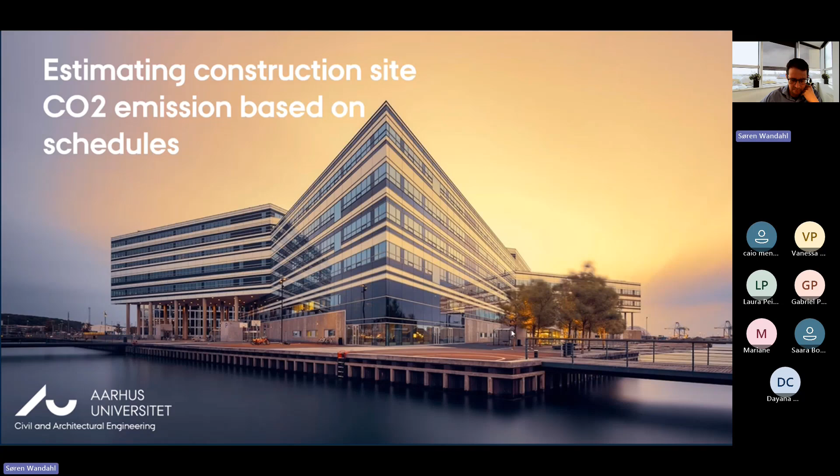Just very briefly about me, not to spend so much time on it. I'm a professor here in our department. I have a bachelor in civil engineering, then a Master of Science, a bit more in operation management, and then a PhD in construction management. That was at another university than Aarhus, it was Aalborg University, not here in Aarhus. I've been here at Aarhus University in Denmark for the last 12 years, and more or less my entire career I worked with production planning and control and lean aspects. For many years it was much about scheduling, productivity, quality and time, and in recent years it's been more and more on green construction sites and how we can use lean principles to make construction more sustainable.

Just so you know who is speaking, I added a few photos of my everyday life outside the university. A picture of my dog, I spend a lot of time with him. I have an old house that I'm renovating. I like to play a lot of darts, and of course I also watch soccer with my two boys, so we spend time on that. Just so you know who I am.

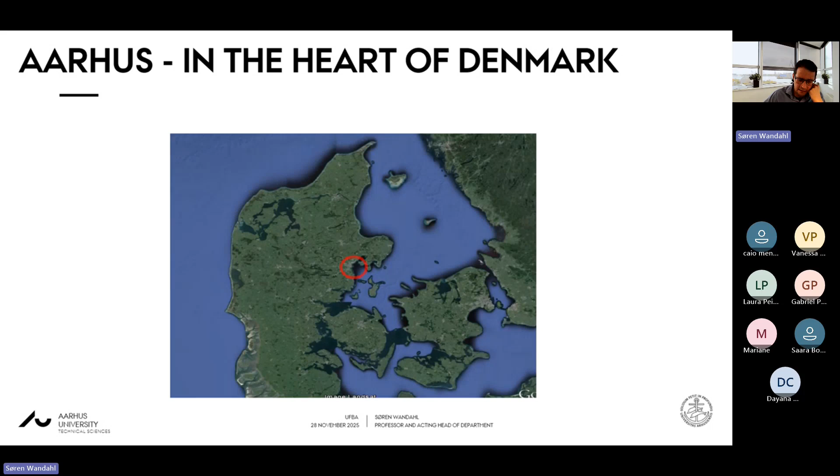As Dayana said, I'm situated here in Denmark, and of course you know where Denmark is. Denmark is a small country in the middle of Europe. They say it's the most happy country in Europe, so I hope that's correct. A small country in the middle, maybe a bit northern of Europe, so it's relatively cold here right now. Zooming in on Denmark, Aarhus is situated here in the red mark in the center of Denmark, about 2-3 hours away from our capital, Copenhagen. Copenhagen is the biggest city in Denmark, and Aarhus is the second largest city.

Our campus is just in the middle of the city center. You can't really see and understand that, but I put a green dot in the upper left corner, which is the campus building where I'm sitting right now at the harbor front. The main campus is marked with the red areas and extended recently with some of the more purple areas, so it's really a city campus. That was just to introduce myself and my department and where I'm from.

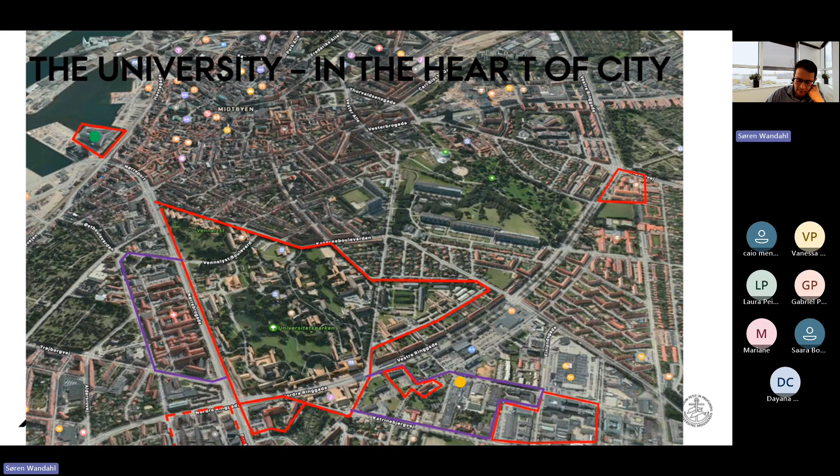I will now move on to talk more about the topic of construction site emissions. These numbers are from the Danish construction industry, but other reports say they are very similar in other countries. Here in Denmark, around 40% of all energy consumption used in Denmark originates in the built environment, to construct buildings and operate buildings. We also have a big waste issue, especially from construction, where today we know that around 35% of all waste generated in Denmark and put onto landfills originates from the built environment. So we are by far the industry in society that generates the most waste.

On the political agenda, there's so much focus on CO2 emissions due to global warming, so a lot of what we do has to reduce CO2 emissions. Estimates show that around 20% of all emissions in Denmark originate from the built environment, and maybe 10% of that is actually from construction and materials, which is where we want to focus today, on construction activities on construction sites. What kind of environmental footprint are we putting on society, and how can we measure that, and how can we reduce that?

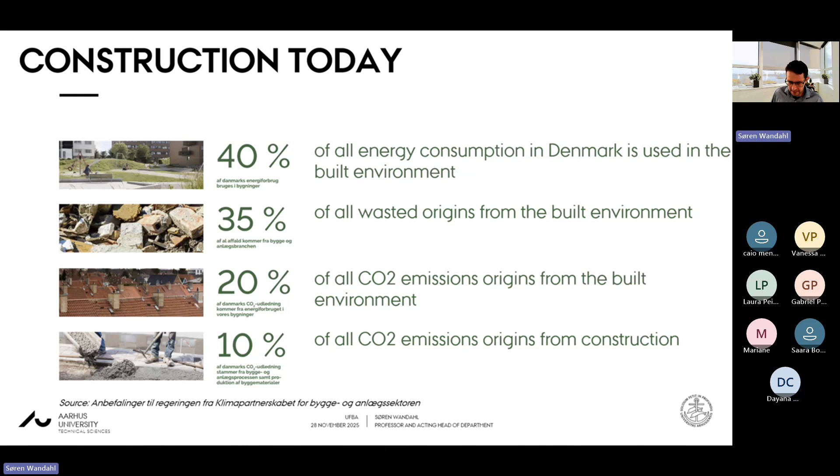So that was kind of to frame the situation. And putting that into a little bit of a historical perspective, there has actually been a big change in how our energy has been used in construction. If you go back maybe 10 or 20 years, looking at what I could call a typical building here.

When you try to separate whether the energy is used for operation purpose or for what they call embodied, meaning used for producing materials and constructing on site, you could see that historically most of the energy consumption was in the operation of buildings for heating, cooling, lighting, and so on.

But today, the engineering design companies are so efficient in designing low energy consuming buildings, which they call high performance buildings. Anyway, designing buildings which have a very low operational energy footprint.

But at the same time, there has been very little focus on reducing the embodied energy use. Here it says embodied carbon, but this is of course the carbon footprint arising due to energy consumption. So we haven't really focused a lot on reducing our material use, changing the type of material, reducing waste of materials, and so on. More or less in Denmark, and I guess it's the same in most countries, we're

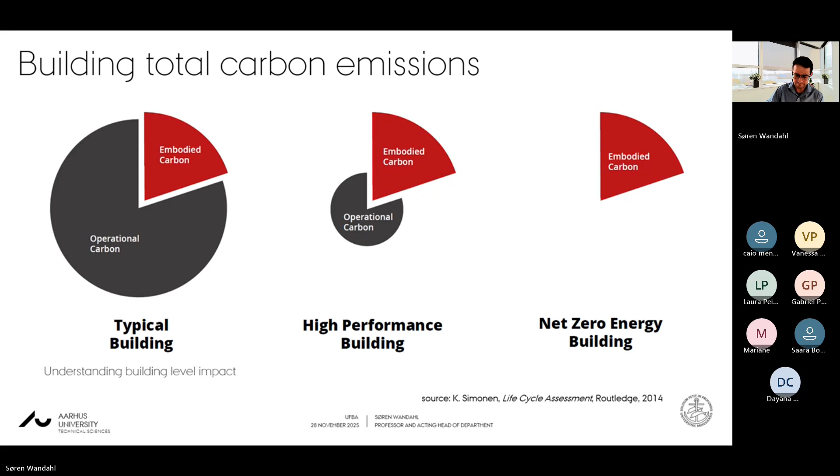To give you a rough idea of how it has changed over time in Denmark, it has actually reduced from maybe around 350 kilowatt hours per square meter per year for operational energy purpose down to 40 in average today. So it is more or less a factor of 10.

But so that's just to frame it. The problem is that we haven't really done anything about the embodied energy, the materials that we are using and wasting on construction sites.

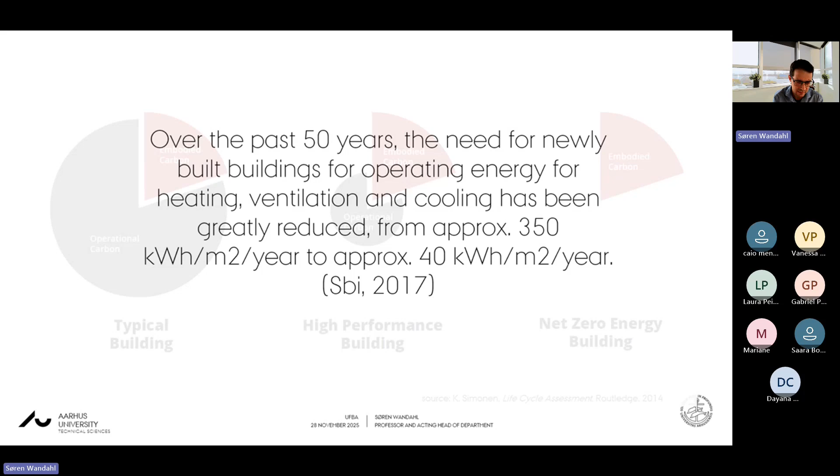And to get that into the equation, it's not enough just to look at operations and how much energy we use in daily operation. So we have to come up with a different framework. And this is typically the framework of the life cycle assessment, or LCA, right?

It's a framework you can use to calculate or evaluate, and maybe use as a starting point to reduce the environmental impact of a product, or here typically a building's entire lifespan. So now we are interested in mapping the energy consumption from raw material extraction to making the materials, to installing them on site, to operating them, to doing maintenance on them, and also at the end of life doing the disposal of these materials. So this is what we call a life cycle assessment.

And the reason I'm putting that forward here is that from this year, 2025, in Denmark, there's a new building code, a new building regulation that requires that all new builds must do a life cycle assessment in order to get a building permit. And there are some thresholds on that, one of which is related to construction site activities, which we will see a little bit later here.

Trying to unfold a bit the life cycle analysis - and I don't know, honestly speaking, how much knowledge you have about life cycle assessment or how used you are to working with it, so this may be purely repetition - but anyway, in a life cycle, we divide it into different stages. We have what we call the A1 to A3 stage, which is production or extraction of raw material, the transportation of these materials to a manufacturer, and the producing of goods. It could be concrete, it could be wooden panels, it could be whatever type of material that we are later going to build in our construction.

And then we are approaching what is of interest to me, the construction site, because we have A4, the phase of transportation to construction site. And then the most interesting part, phase A5, which is where we have our construction stage. This is the installation, all activities on construction site. Then at some point, a project is completed, it's handed over and starts operation.

And then we have all what they call B1 through B7 stages, which is the use, the maintenance, the repair, the refurbishment, operation of energy, operation of water, and so on. So everything you do throughout the operation of the building. And eventually, we have an end of life stage of a building where you are deconstructing, demolishing the building, transporting the waste material away, and doing disposal of that. So this is the entire life cycle of a building.

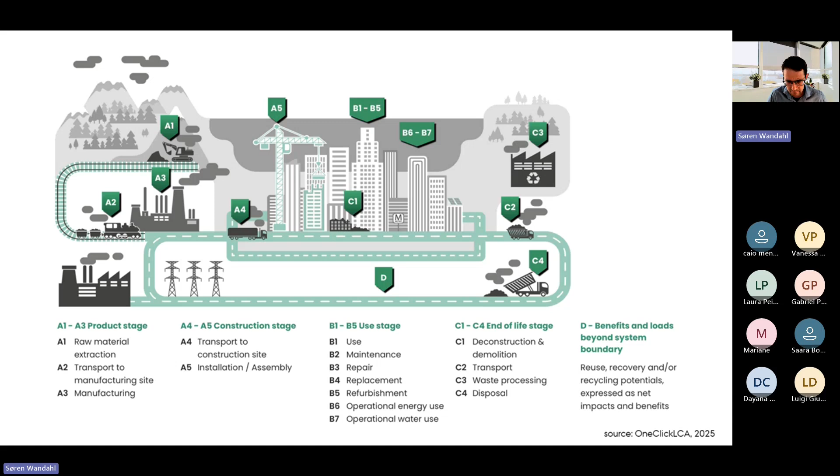And today we are going to focus mainly on the phases A4 and A5, which of course is the one that is relevant when we are talking about construction management and engineering.

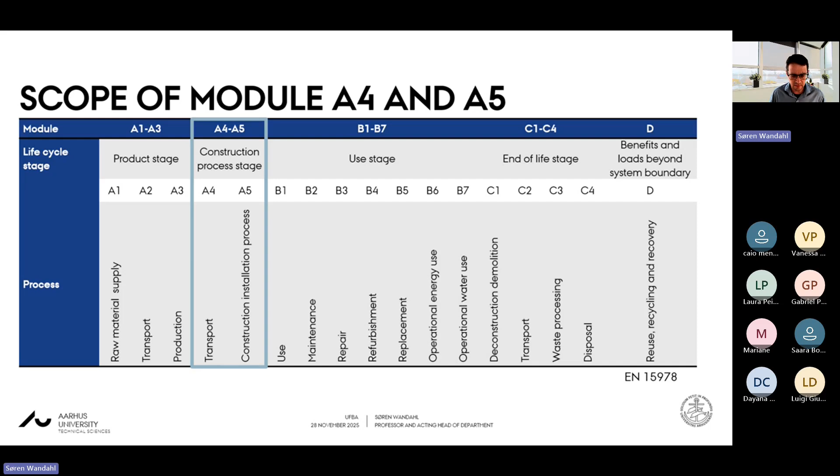But then on the construction site, we have a lot of activities going on, construction activities, of course. And many of these are using energy. It could be for processing, for using machinery on the construction site. It is for lighting of the construction site, for electricity in our offices on construction site. At least in Denmark, it's also in the wintertime for heating of construction sites and so on. So we have a lot of different sources of energy consumption on the construction site.

And then we also generate some waste. It could be material waste, soil waste, and other types of waste, which we then have to transport away from the construction site again. So this is our boundary condition here for construction management, looking at how sustainable a construction site is and what environmental footprint such a construction site will generate.

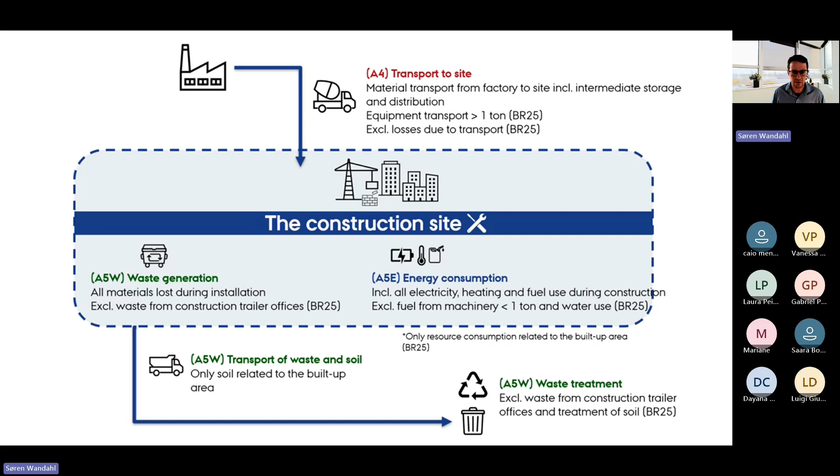And as I mentioned, here in Denmark, we have a new building regulation from this year, 1st of July this year, so it has been enforced now for almost half a year. And I guess we are actually right now the first and maybe also yet the only country in the world that has a strict life cycle analysis requirement for construction phase A4 and A5. So today, in order to get a building permit, a project has to document that they are below a threshold value of 1.5 kilograms CO2 per square meter per year for construction activities, the A4 and A5 combined.

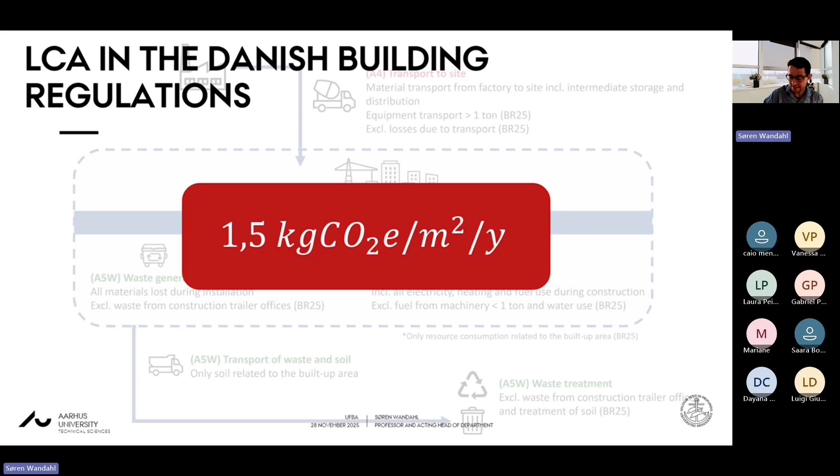Of course, when you put on regulatory threshold values, the industry, they start to listen, right? Because now it's become super important for the industry that they can achieve these building permits. So now the industry has suddenly become very, very interested in construction site energy use and carbon footprint.

But the problem is actually that we know very little about this energy use on A4 and A5. And the Danish government, when they launched this regulation of 1.5, they also said that this is their first attempt to regulate. They don't know whether that 1.5 is a strong threshold value or an easy threshold value. They assume that some projects will have it easy to comply with the threshold, and others will have more difficulties.

So, of course, as a research institution, one of our tasks is to investigate that further and create some knowledge around that. So we're doing a lot of research and some case studies. And here I just took some examples of a case study we have, some master students that are doing right now. So they have been looking at different construction cases and trying to do the life cycle assessment of these cases, specifically looking into A4 and A5, which is of interest to us, again, what's going on the construction site.

So this study here, which includes 10 case studies, you can see that the A4, A5 combined in this analysis is around 0.58 to 3.46 kilogram of CO2 per square meter per year. The median is 1.21, and as I said, the regulatory framework is 1.5. So you can see some projects are above, but many projects in this small case study are below the threshold value.

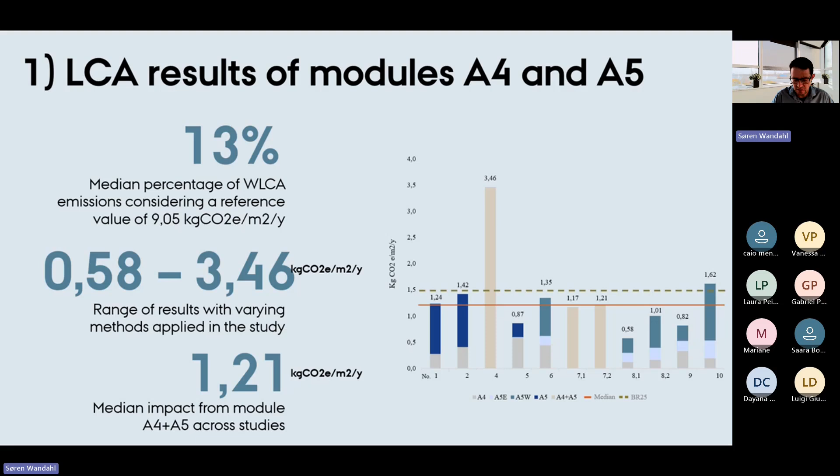If we try to dig a little bit deeper into what are the sources of this emissions on A5 and A4, again it's only based on these 10 case studies. In this small study we also have other case studies that have numbers that are not totally identical but showing the same trends. So what we see is that the energy used on construction site, meaning the fuel, electricity and so on used for machines, for operations, for cranes, for trucks, Manitous, whatever working on construction site, is around 17% of that footprint.

28% of that footprint originates from transportation to construction site, meaning delivery of materials from suppliers and vendors and so on. But the biggest problem in the life cycle assessment is the waste generated on construction sites. This actually accounts for maybe half of our footprint when we do a life cycle assessment. So for sure there is some very interesting research to be looked at on how to reduce construction waste, because it is a super big root cause for environmental footprint of our projects.

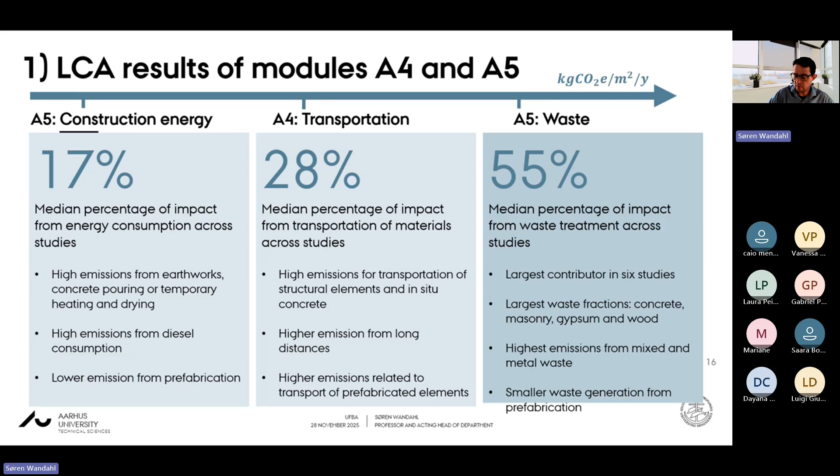And just to give you a little bit more information about the type of construction waste that we typically generate: in Denmark we generate around 5 million tons of construction waste. Maybe that number is a bit difficult to put into context, but it is more or less equivalent to 70 kilogram of waste per square meter of new build you construct. So think about it in this way, that if you are constructing a house or an apartment of 100 square meters, you generate 7 tons of waste.

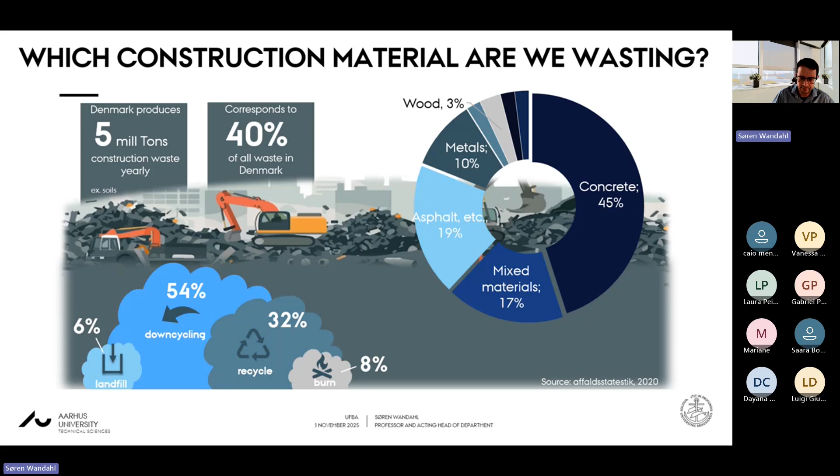So this was the kind of background of the energy consumption, to give you a little bit of an update. And one of the things that we have been looking into in that context is this question of how do we actually monitor how much emissions and how much energy there is on the construction site. And this, as you will see in a minute, is actually quite complicated, to get a very precise and exact number of what is the energy used on the construction site, because it has so many different sources.

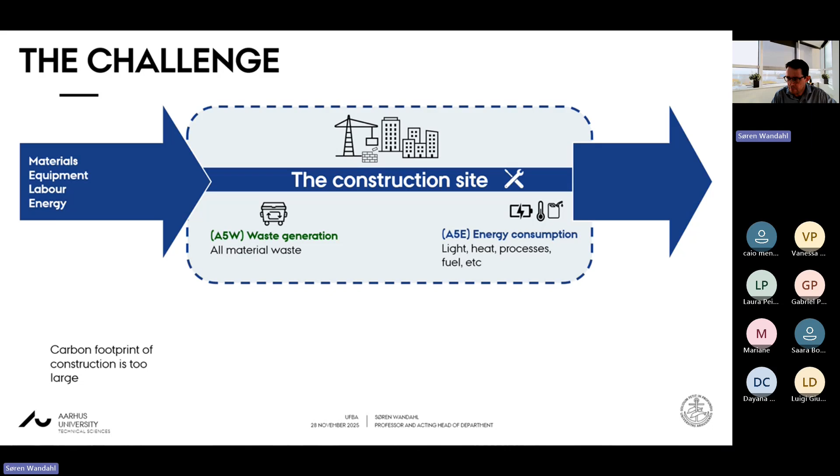So again, to show you the challenge here, this is the construction site. As I mentioned before, we have a lot of things coming into the construction site, which is materials, equipment, labor, energy and so on, and something coming out of it. And again, we know that the carbon footprint of construction is too large. We have this new regulatory threshold, and a client and a contractor now of course have to document this threshold, document that they are below this threshold in order to get the building permit. So how do they actually get the data? That's a big concern for many contractors now.

And to get the data, there's a question about how do we actually monitor our energy consumption on the construction site. What type of sensors or what type of data are we using to monitor our energy consumption? And then, of course, there's also a big question of how do we actually reduce the energy consumption if we are above the threshold.

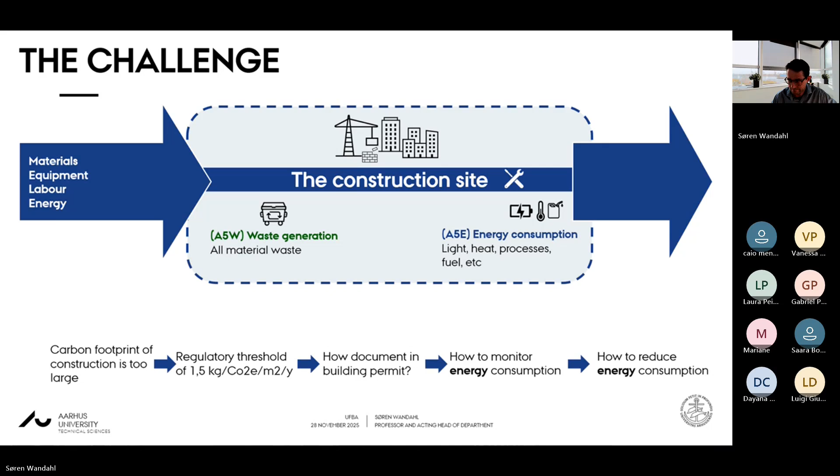So generally speaking, there are different methods of collecting that type of data. One method could be to use IoT, different technologies, different sensors. You could put sensors on your power, your electricity. You could put sensors on moving equipment. You can have computer vision monitoring waste disposal and stuff like that. So there's a lot of technology possibilities to use IoT to get that data.

But the problem is that the construction industry is not yet very used to using a lot of IoT. So when you come to a contractor and talk about sensors and monitoring, they are a bit scared about that.

So another approach to get data is to do data mining on everything that is being transported into the construction site. So we can monitor invoices, for instance, or track delivery times and delivery quantities. We have bills of quantities and so on. So we can do a lot of data mining in systems and in papers on what has been delivered, and then we can try to associate that to energy on the construction site.

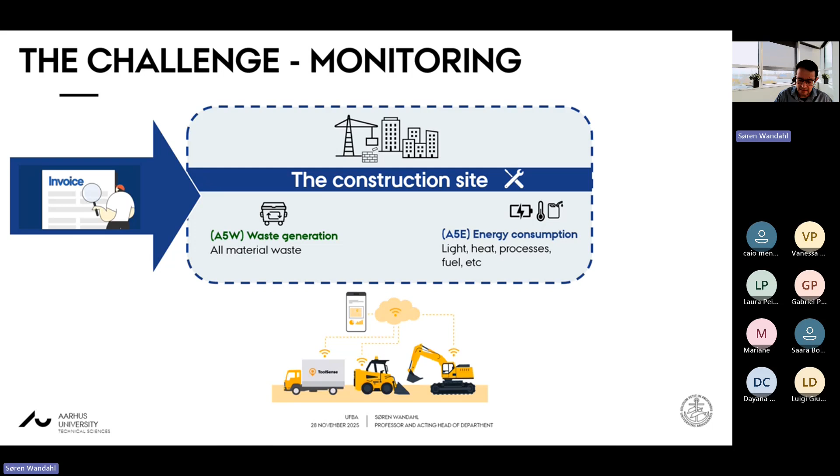And there's a lot of research projects going on right now. We have some of them here in our department. We have Jonathan who's doing some, and I guess also a larger EU project is trying to look into that. But in this small research, our starting point was that this is a little bit complicated, all this technology and data mining. So would there be an easier way to get the data, maybe not as precise, but as a rough estimate?

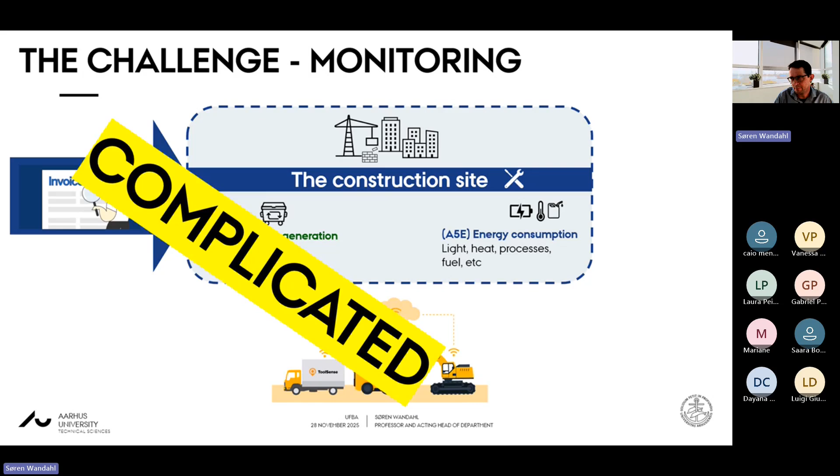So here comes the idea that we have been working on in this research project, and that is that we know that all construction sites have a schedule. And for sure you have probably seen many different schedules, and you know that they come in different qualities and different levels of detail. Some schedules are very detailed, and these are good for this purpose. If you have schedules that are not very detailed, they're not very good for this purpose of estimating construction site emissions.

But if you have a schedule like shown here, a takt time schedule, where you have it divided into different zones and different activities, with different takt times, zones, and so on, it's actually possible to get a lot of detailed information about activities, durations, processes, and resources.

And if we import some more generic energy consumption tables, meaning that we do not know exactly what type of excavator is used or what type of crane is on this construction site, but we know the type of activity and that it requires a crane or a truck or an excavator or whatever, then if we use generic data for that, we should be able to do some estimation.

And I really have to underline the word estimate. So when you do estimation, it's not about being very, very precise to two digits. It's about delivering an estimate that is a rough number on what direction we are in.

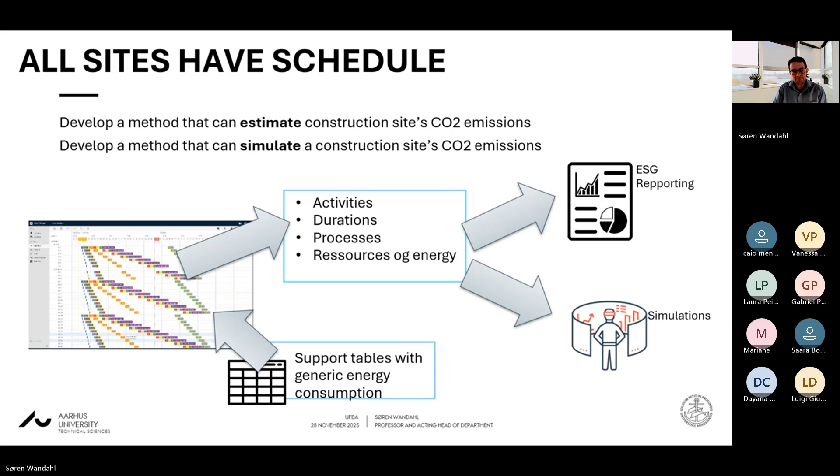So what we did in this project was a case-based project. We had a number of cases which were already finished, and we had all the detailed schedules and activities in the schedules. And then we were trying to build up a number of different equations to extract out that energy data from the activities in the construction site.

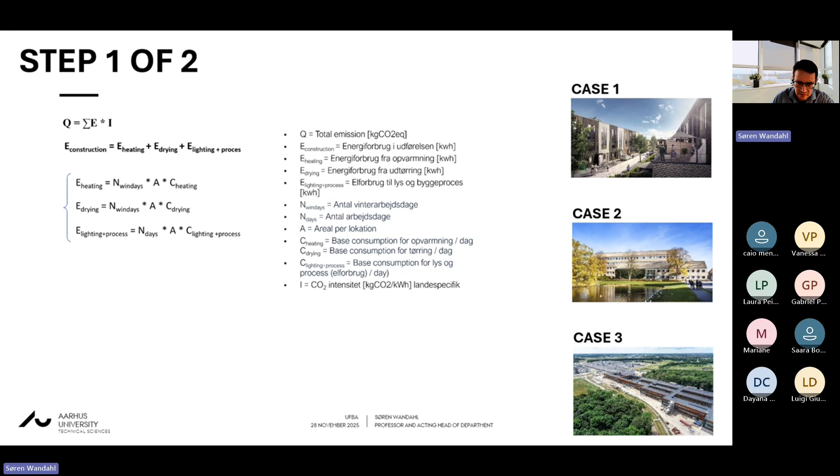One part of it is to extract energy data that is related to electricity. That's actually the easiest part, because it's quite easy to monitor electricity consumption. So heating, drying, lighting, processing. This is what we did here. And later we added the equations and the data extraction for all moving machinery. But step one was to do it on electricity, and we did it on these 3 different types of cases, as you can see here.

One of the cases was a 9,000 square meter housing project. Looking only at the electricity consumption, now that we have connected all the data in our scheduling software, we have the supporting tables, we have everything, we could play around with different scenarios. For instance, a scenario where we have lights turned on 24/7 in all areas of the construction site, and we are heating all parts of the construction site because it's wintertime in Denmark.

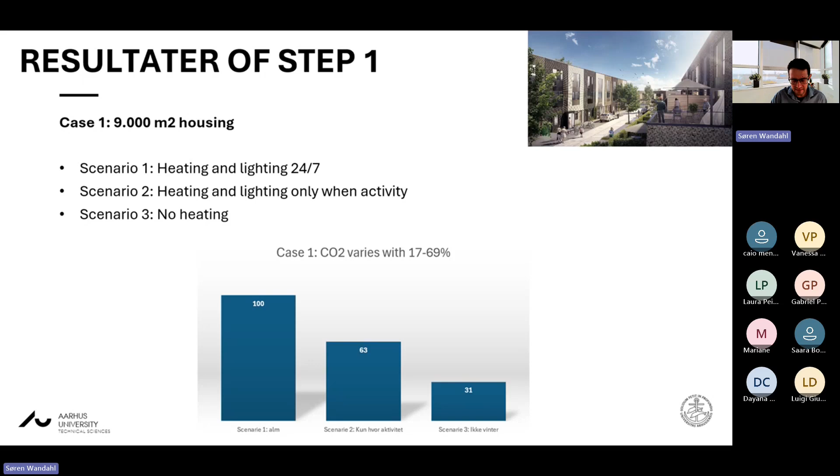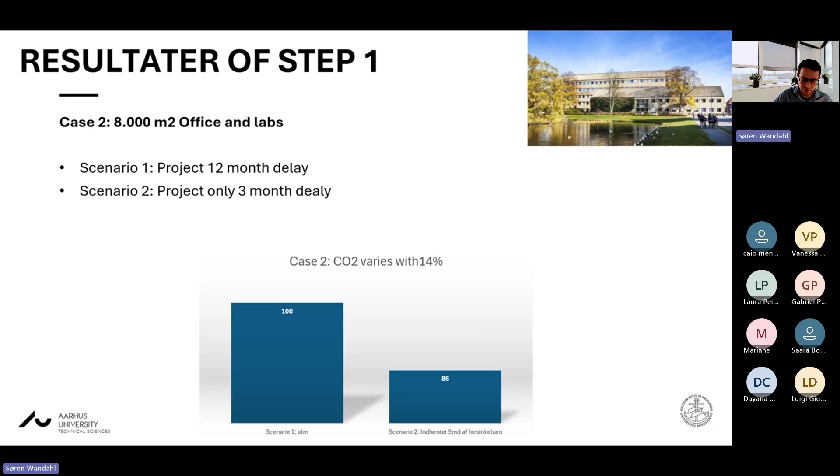The second project was a university campus building with some offices and some labs for biochemistry or something like that. That project ended with a 12-month delay, so we had the data on that. Then we tried to simulate, what if they had managed to end with only a 3-month delay? If they had succeeded in that, it would have generated 14% less CO2 on the construction site, because it has fewer production hours with heating, lighting, processing, and so on.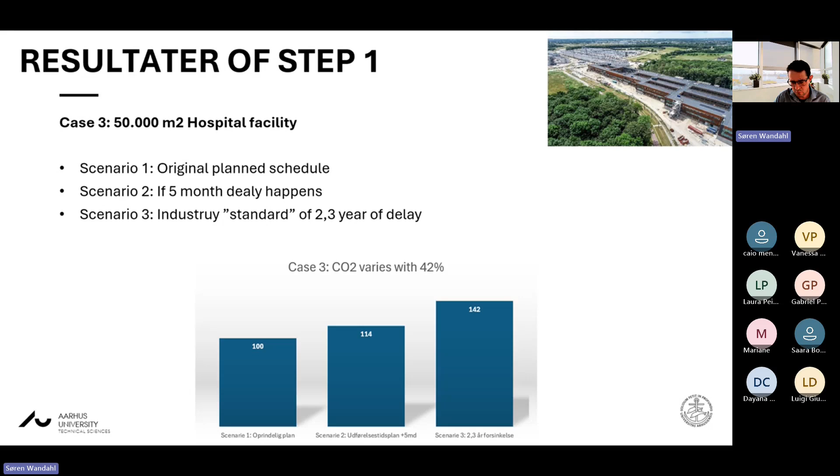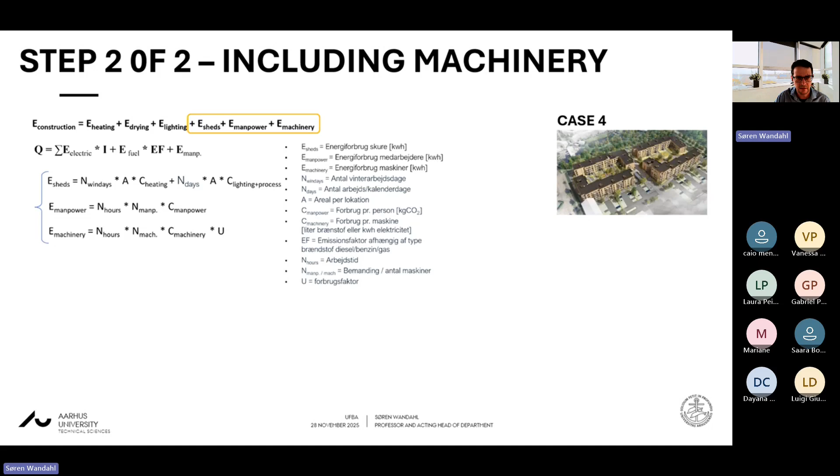Then eventually we managed to include all the data on machinery and manpower moving around on construction sites, which is the trickier part to get data on. We did that on a housing case study. We had the original schedule, a scenario with low manpower and machines, so a longer construction time, and a scenario where we tried to double the manpower to shorten the duration. Again, just to simulate different scenarios and see the outcome in terms of CO2 emissions.

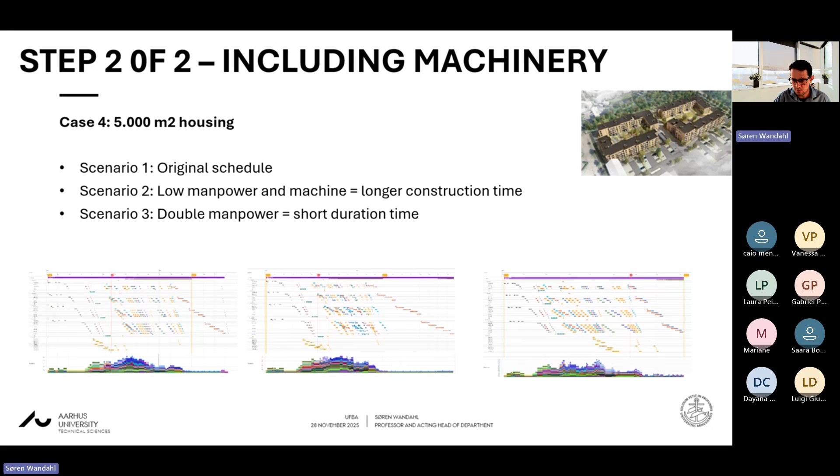And these were the results of that project. So you can see that it varies from 0.43 to 0.63 kilograms CO2 per square meter per year, which is nicely below the threshold. But remember that this doesn't include all the construction site waste. So that comes on top of it.

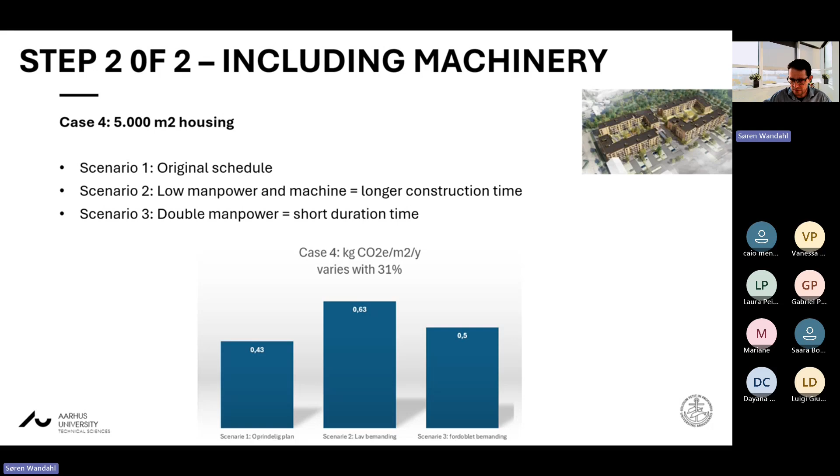So that was more or less the idea of this project, to see if it is possible to estimate construction site emissions based only on our schedules. And to try to conclude on that, then yes, it is possible to estimate that. And again, I have underlined or put in bold here the estimate part,

because in these different cases, we didn't do the as-is situation understood in that way. We didn't go out and measure if that number we calculated was actually exactly correct. We didn't track the construction site energy consumption for this project. We only simulated it based on our schedules. So the question is, how precise are these estimates? This is one of the questions that we're looking into right now.

And when you want to answer a question of how precise the data is, you should also have the question in mind, how precise do they actually need to be? And especially taking into account that we now know for sure, because we have demonstrated it, that the construction site emissions are very dependent on the dynamic conditions that happen during construction, delays, change of manpower, change of equipment, and so on. All those are decisions that are taken after the building permit. So the question is, how precise do we actually need to be in order to get the building permit? Because we know that that number is very dynamic nonetheless.

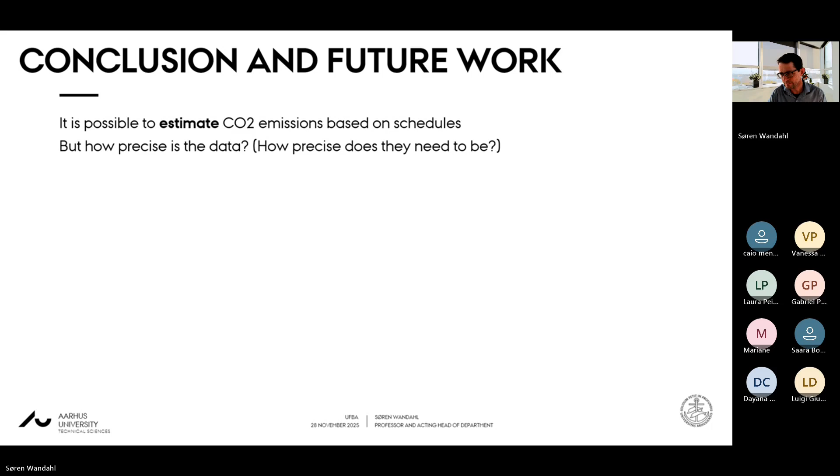Yeah, so as I mentioned here, the actual emission can easily vary from the estimation based on delays, change in equipment, or whether you try to optimize your construction site schedule to reduce CO₂ emissions, or if you do not try to optimize it at all.

And from a regulatory perspective, the question also arises what to do about it. I mean, what will the municipality, or authorities, do if they discover a construction project that received a building permit because the simulations of construction site activities were below 1.5, but then the construction phase started, and a lot of change occurred.

They took out all the new machinery, putting in old machinery that is using a lot of fuel and so on. They were having a lot of delays because there was a lot of risk and uncertainty in the project and so on. And maybe at the end of the day, they ended up with a number that is way above threshold, maybe 2.5, maybe 3, who knows. What would you do about it? I mean, because you can't change it anymore. You already had all the emissions.

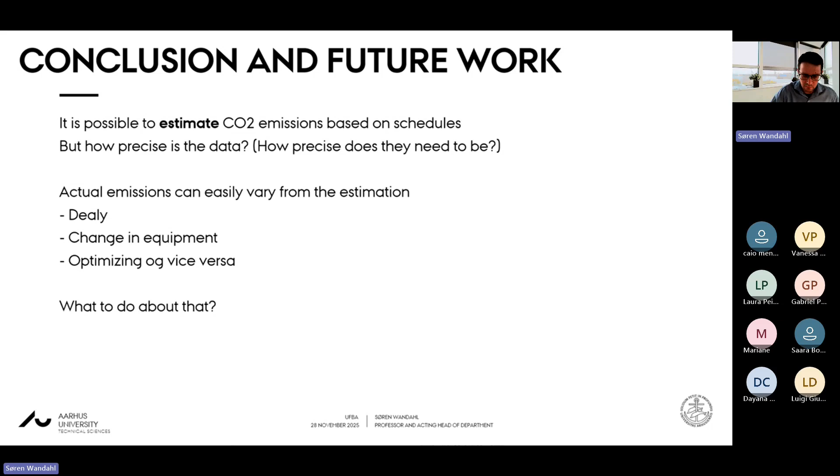But of course, a lot of that waste is waste of virgin materials, and that is highly critical for our life cycle. It's highly critical for our emissions, and it's highly critical for our resources, what do you call it, the amount of resources that we actually have on our Earth. So, for instance, here in Denmark, they're already talking about a lack of gravel. As another example, they are now talking that we will soon have a lack of biomaterials, so a lack of timber. So it doesn't really help us that we are wasting so much material on the construction site.